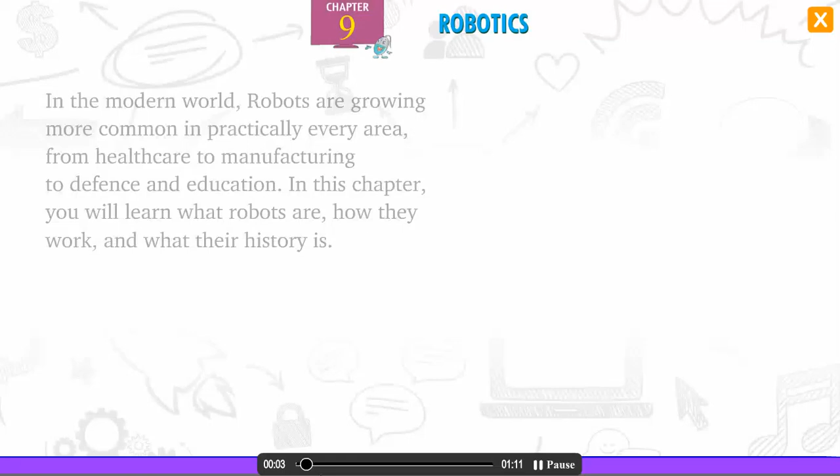Chapter 9, Robotics. In the modern world, robots are growing more common in practically every area, from healthcare to manufacturing to defense and education. In this chapter, you will learn what robots are, how they work, and what their history is.

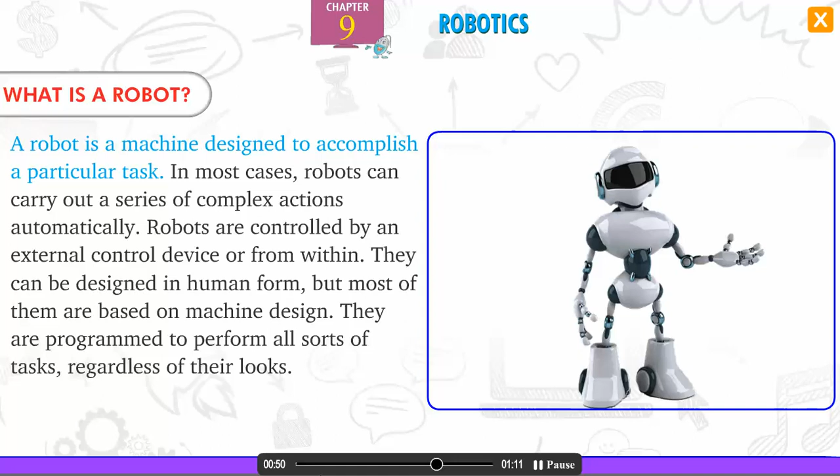What is a robot? A robot is a machine designed to accomplish a particular task. In most cases, robots can carry out a series of complex actions automatically. Robots are controlled by an external control device or from within. They can be designed in human form, but most of them are based on machine design. They are programmed to perform all sorts of tasks, regardless of their looks.

The word robot was coined by the Czech writer Karel Čapek in a 1920 play called Rossum's Universal Robots, and is derived from the Czech word robota, meaning drudgery or servitude.

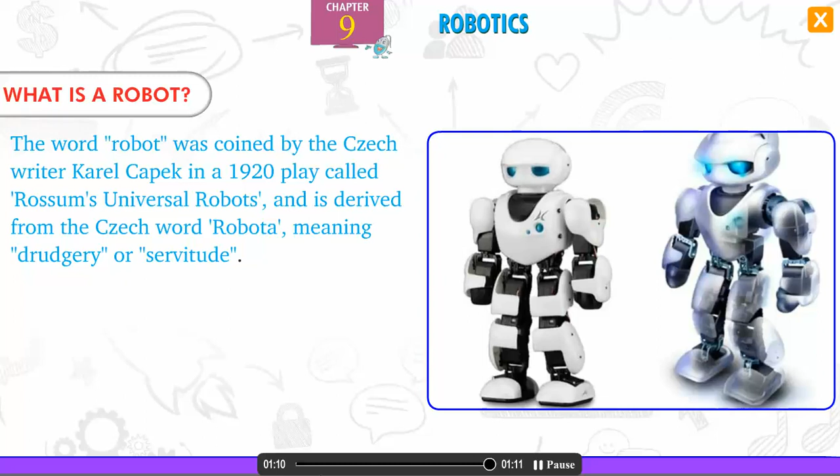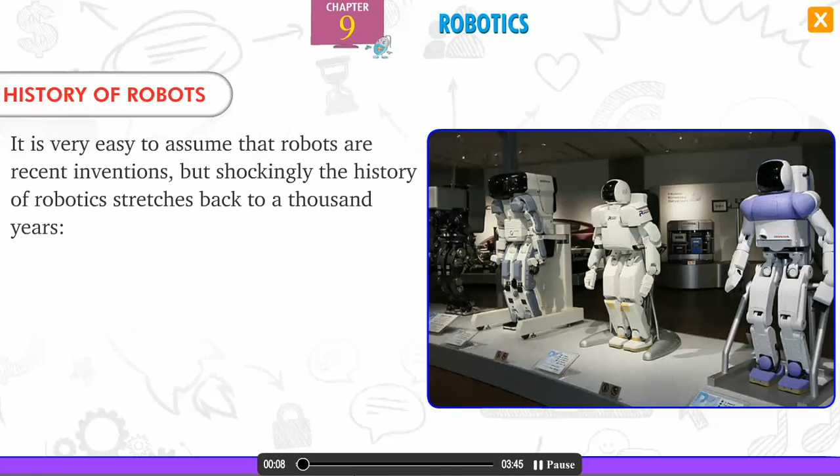Chapter 9, History of Robots. It is very easy to assume that robots are recent inventions, but shockingly, the history of robotics stretches back 1,000 years.

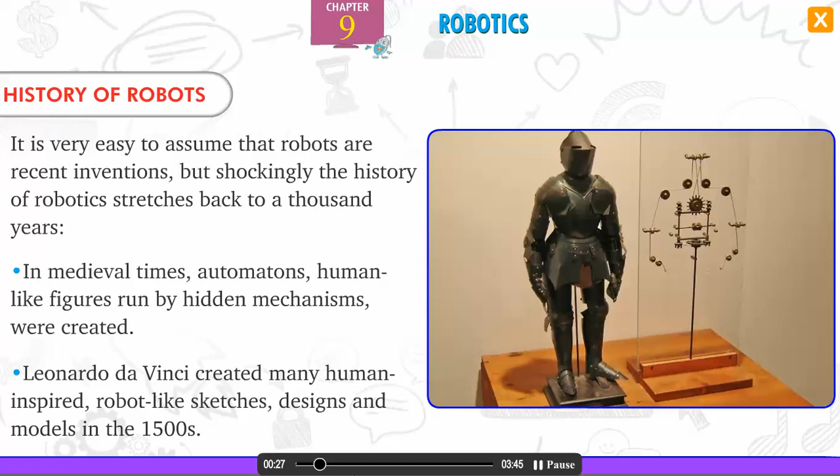In medieval times, automatons, human-like figures run by hidden mechanisms, were created. Leonardo da Vinci created many human-inspired robot-like sketches, designs and models in the 1500s. In the 18th century, miniature automatons became popular as toys for the very rich. They were made to look and move like humans or small animals.

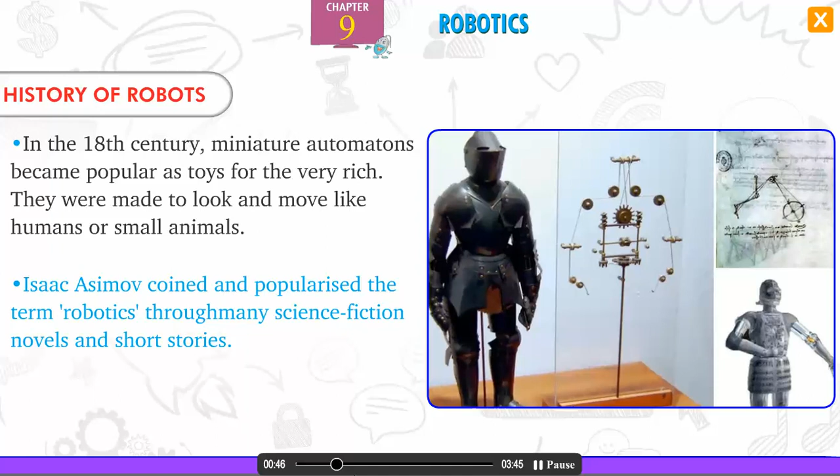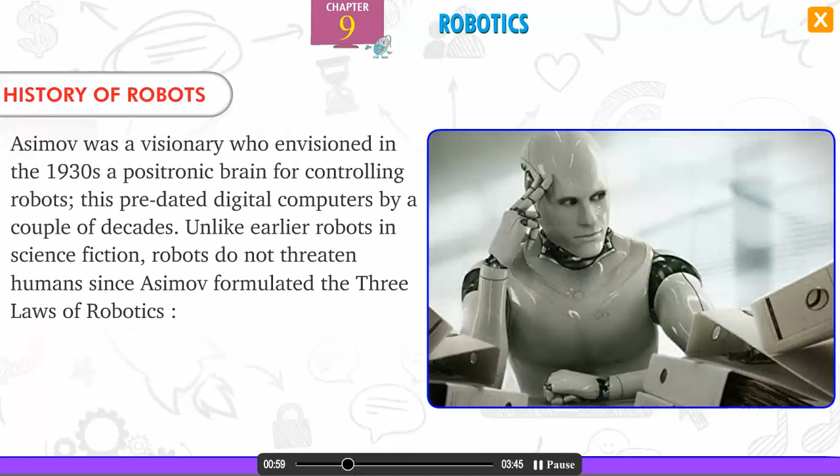Isaac Asimov coined and popularized the term robotics through many science fiction novels and short stories. Asimov was a visionary who envisioned in the 1930s a positronic brain for controlling robots. This predated digital computers by a couple of decades.

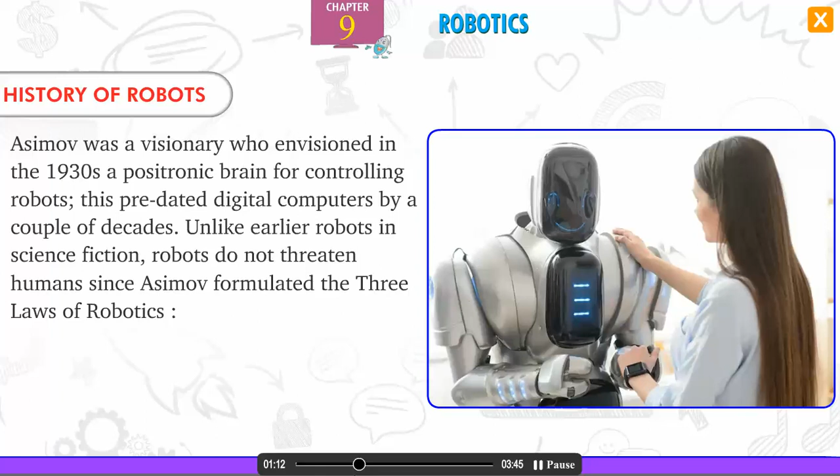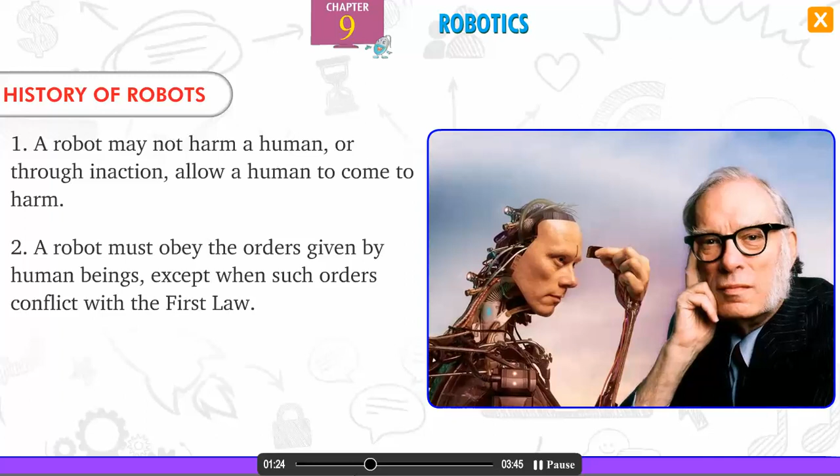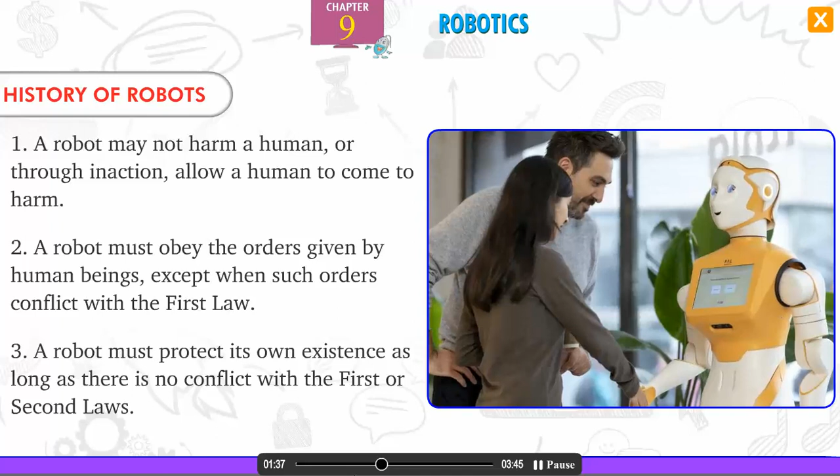Unlike earlier robots in science fiction, robots do not threaten humans since Asimov formulated the 3 laws of robotics. 1. A robot may not harm a human or through inaction allow a human to come to harm. 2. A robot must obey the orders given by human beings except when such orders conflict with the first law. 3. A robot must protect its own existence as long as there is no conflict with the first or second laws. Joseph Engelberger and George Devol were the fathers of industrial robots.

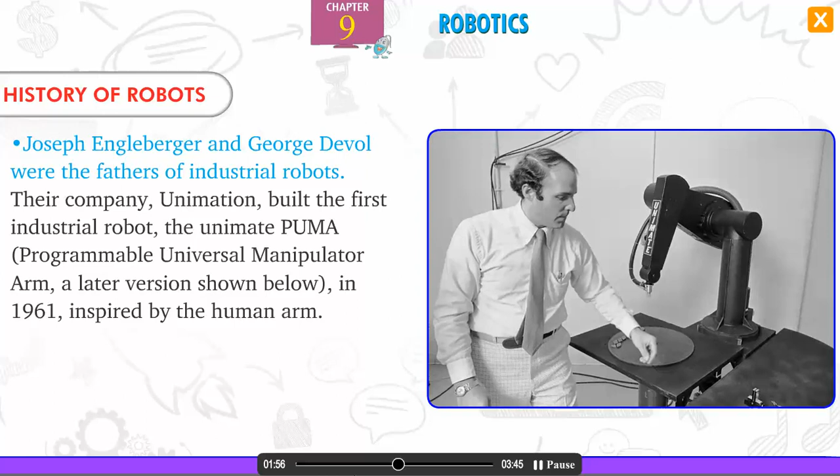Their company, Unimation, built the first industrial robot, the Unimate PUMA, Programmable Universal Manipulator Arm, a later version shown below, in 1961, inspired by the human arm.

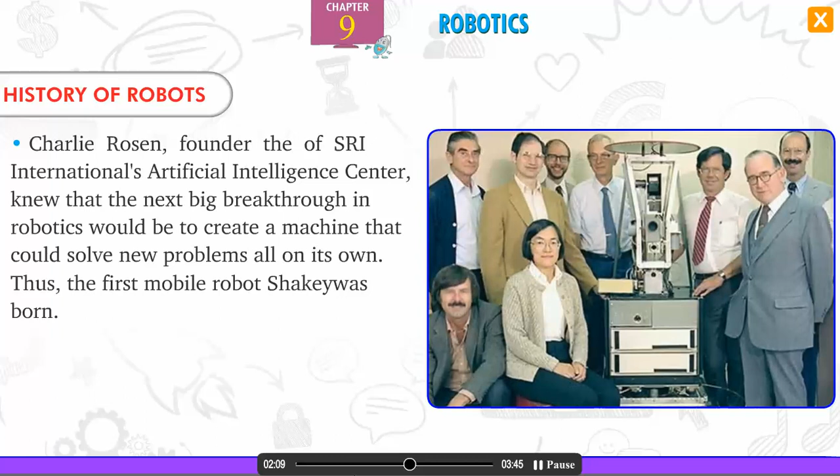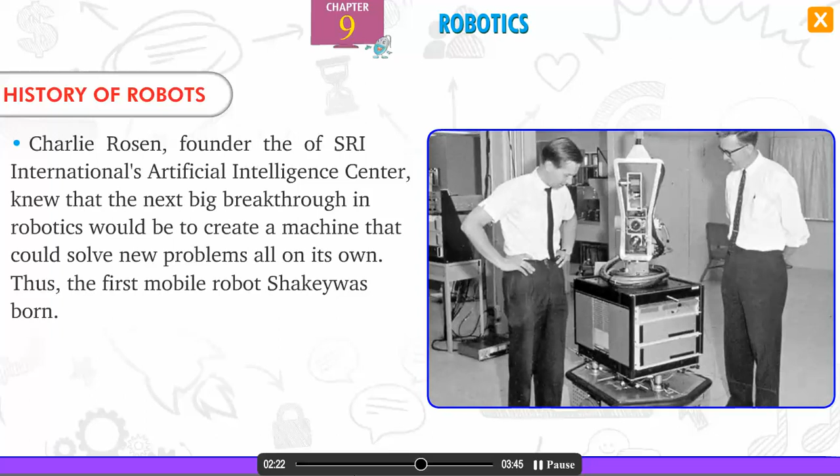Charlie Rosen, founder of SRI International's Artificial Intelligence Center, knew that the next big breakthrough in robotics would be to create a machine that could solve new problems all on its own. Thus, the first mobile robot, Shakey, was born.

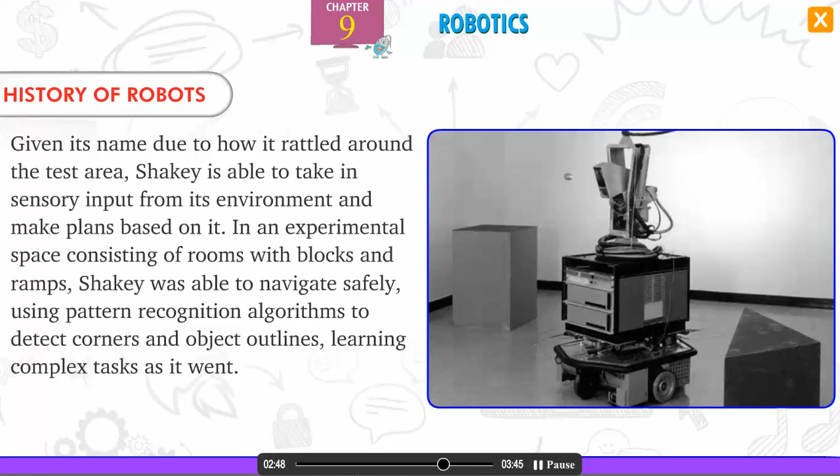Given its name due to how it rattled around the test area, Shakey is able to take in sensory input from its environment and make plans based on it. In an experimental space consisting of rooms with blocks and ramps, Shakey was able to navigate safely using pattern recognition algorithms to detect corners and object outlines, learning complex tasks as it went.

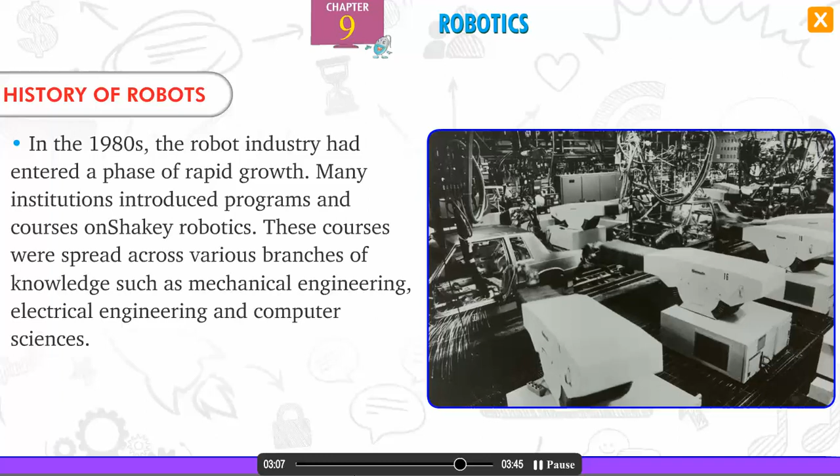In the 1980s, the robot industry had entered a phase of rapid growth. Many institutions introduced programs and courses on robotics. These courses were spread across various branches of knowledge such as mechanical engineering, electrical engineering, and computer sciences.

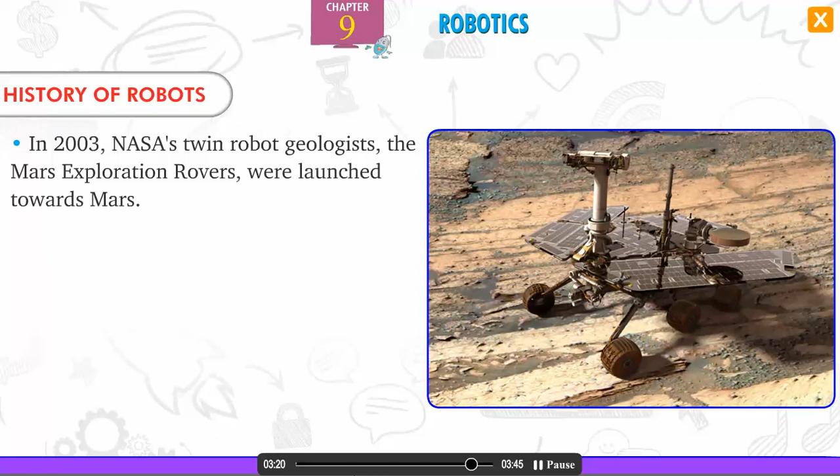In 2003, NASA's twin robot geologists, the Mars exploration rovers, were launched towards Mars. Remember, on 10 June and 7 July 2003, Mars exploration rovers were sent in search of water on Mars. This program was a long-term effort in the field of robotic exploration of space.

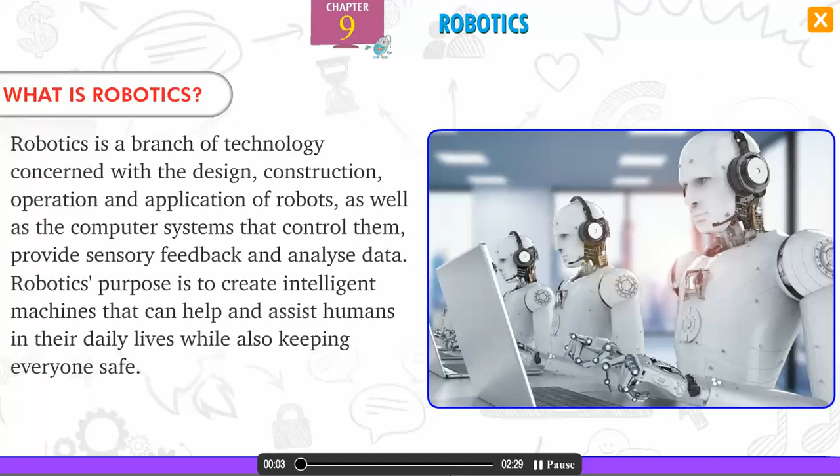History of Robotics. What is robotics? Robotics is a branch of technology concerned with the design, construction, operation and application of robots, as well as the computer systems that control them, provide sensory feedback and analyze data.

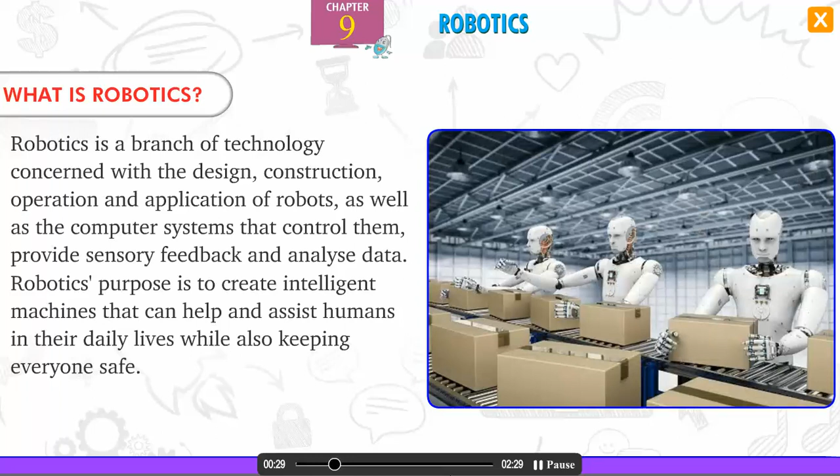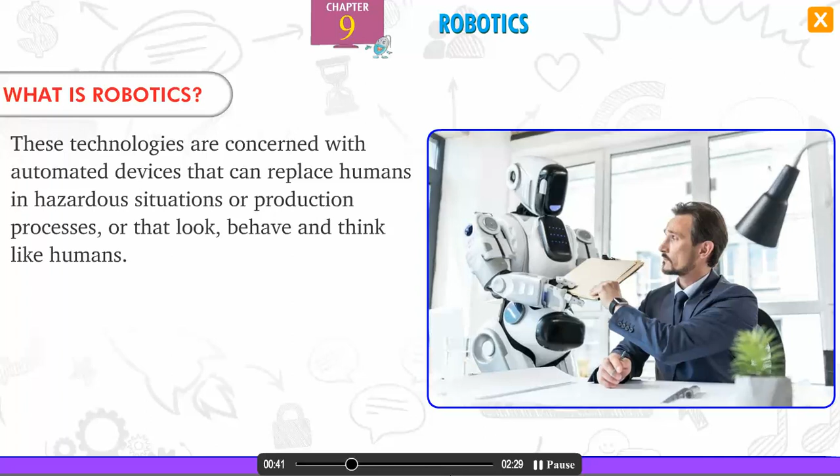Robotics' purpose is to create intelligent machines that can help and assist humans in their daily lives while also keeping everyone safe. These technologies are concerned with automated devices that can replace humans in hazardous situations or production processes, or that look, behave, and think like humans.

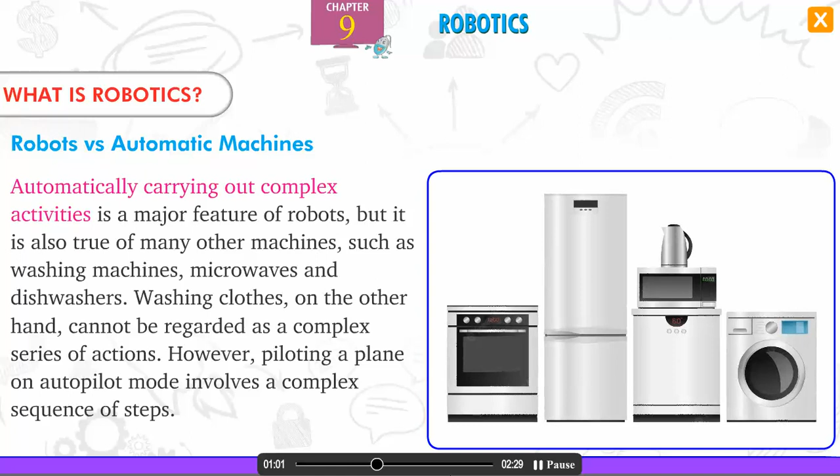Robots versus automatic machines. Automatically carrying out complex activities is a major feature of robots, but it is also true of many other machines such as washing machines, microwaves, and dishwashers. Washing clothes, on the other hand, cannot be regarded as a complex series of actions. However, piloting a plane on autopilot mode involves a complex sequence of steps.

As a result, many machines and robots are on the point of becoming automated. Many automatic devices are programmed mechanically and are not very flexible. Therefore, being programmable by a computer is another important feature of robots. However, because computers are already commonplace, it is difficult to use these features to differentiate a robot from another machine.

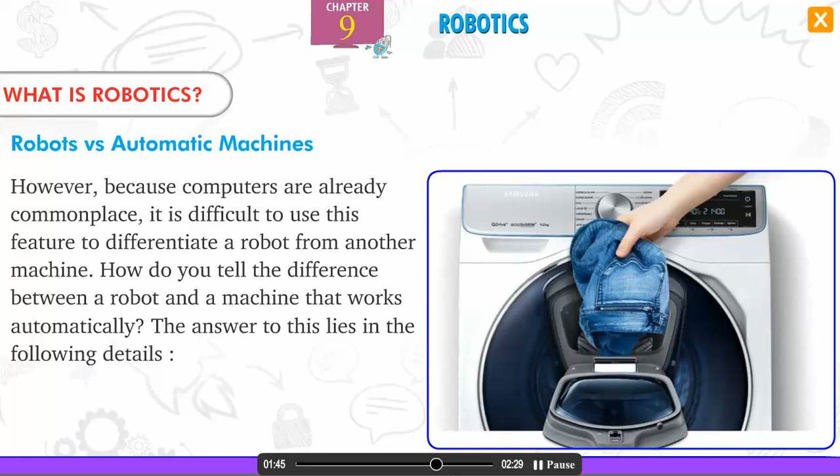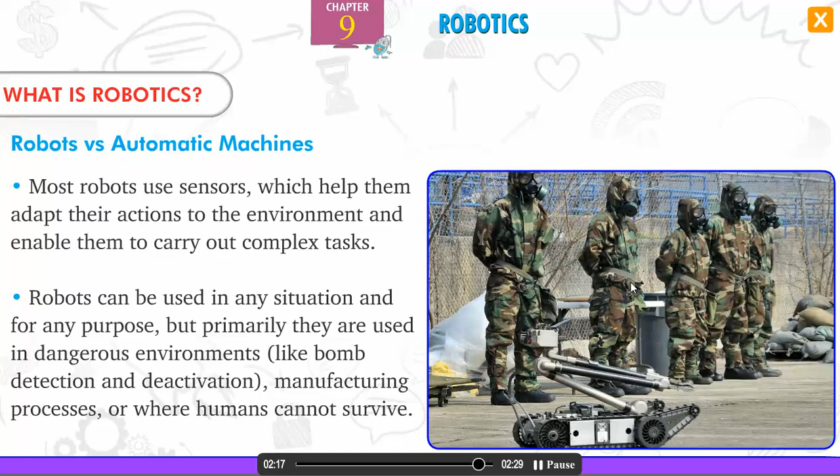How do you tell the difference between a robot and a machine that works automatically? The answer lies in the following details. Most robots use sensors, which help them adapt their actions to the environment and enable them to carry out complex tasks. Robots can be used in any situations or for any purpose, but primarily they are used in dangerous environments like bomb detection and deactivation, manufacturing processes, or where humans cannot survive.

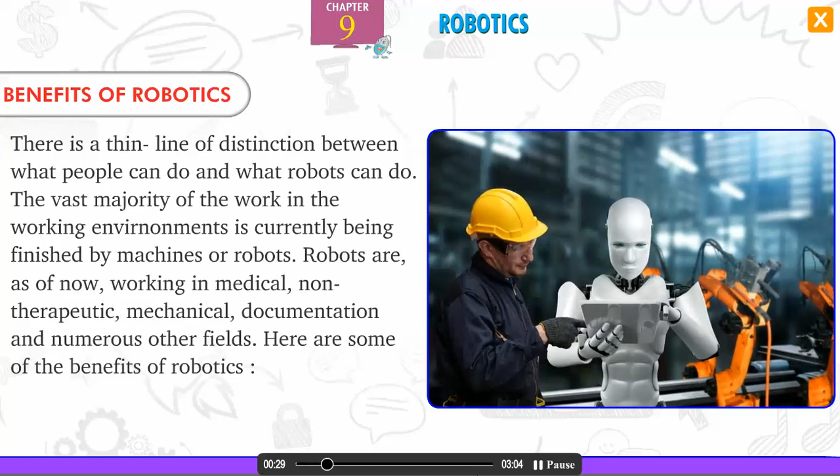Benefits of robotics. There is a thin line of distinction between what people can do and what robots can do. The vast majority of the work in working environments is currently being finished by machines or robots. Robots are, as of now, working in medical, non-therapeutic, mechanical, documentation, and numerous other fields. Here are some of the benefits of robotics.

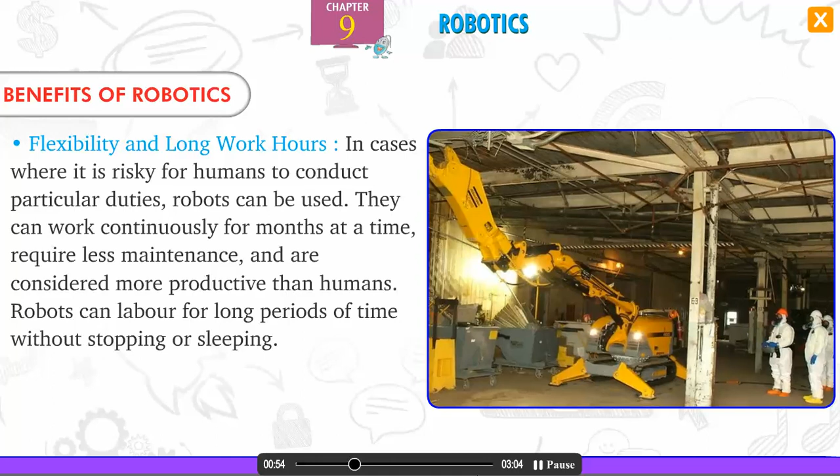Flexibility and long work hours. In cases where it is risky for humans to conduct particular duties, robots can be used. They can work continuously for months at a time, require less maintenance, and are considered more productive than humans. Robots can labor for long periods of time without stopping or sleeping.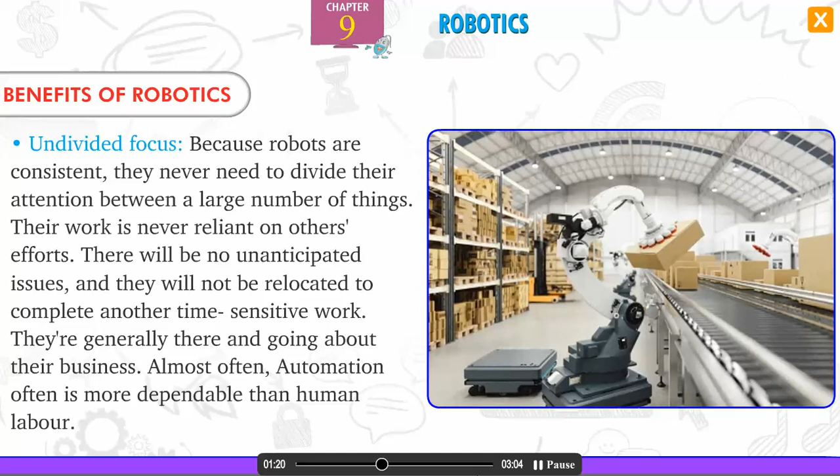Undivided focus. Because robots are consistent, they never need to divide their attention between a large number of things. Their work is never reliant on others' efforts. There will be no unanticipated issues, and they will not be relocated to complete another time-sensitive work. They are generally there and going about their business. Almost always, automation is more dependable than human labor.

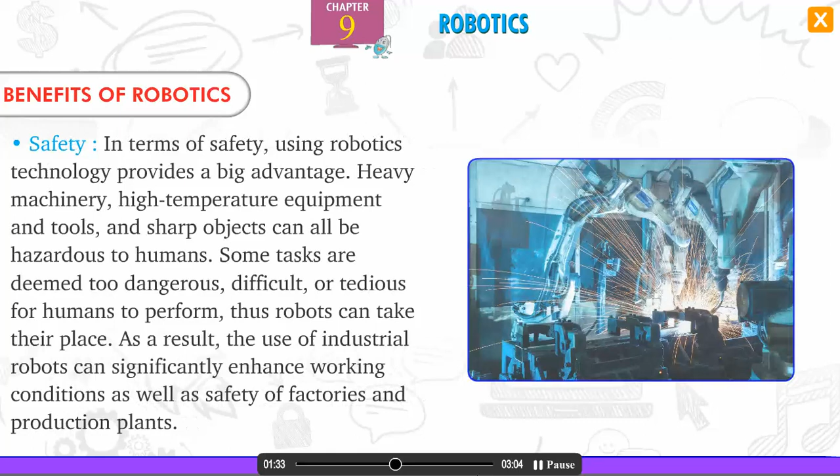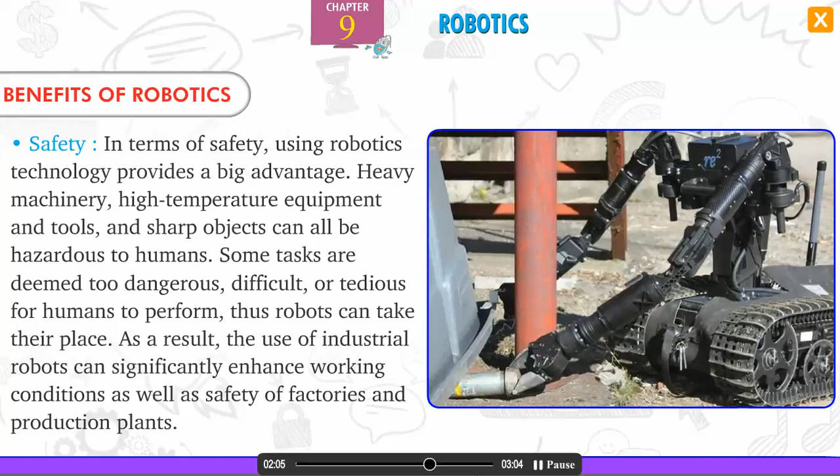Safety. In terms of safety, using robotics technology provides a big advantage. Heavy machinery, high temperature equipment and tools, and sharp objects can all be hazardous to humans. Some tasks are deemed too dangerous, difficult, or tedious for humans to perform. Thus, robots can take their place. As a result, the use of industrial robots can significantly enhance working conditions as well as safety of factories and production plants. Increase output with efficiency.

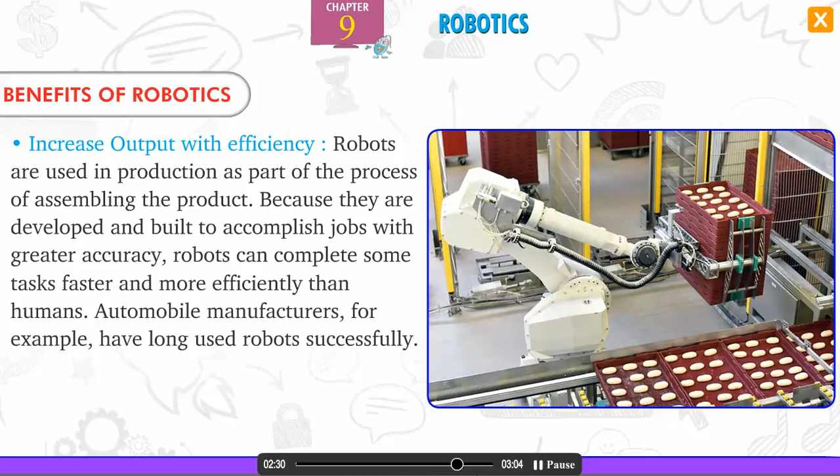Robots are used in production as part of the process of assembling the product. Because they are developed and built to accomplish jobs with greater accuracy, robots can complete some tasks faster and more efficiently than humans. Automobile manufacturers, for example, have long used robots successfully.

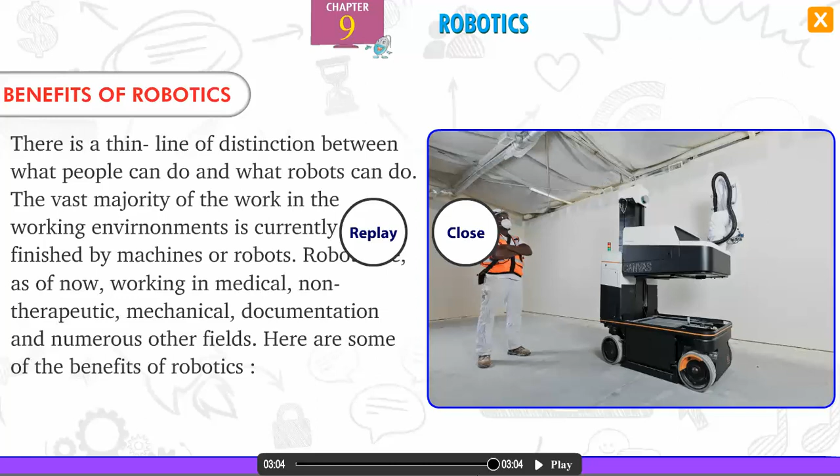Benefits of robotics. There is a thin line of distinction between what people can do and what robots can do. The vast majority of the work in working environments is currently being finished by machines or robots. Robots are, as of now, working in medical, non-therapeutic, mechanical, documentation, and other fields.

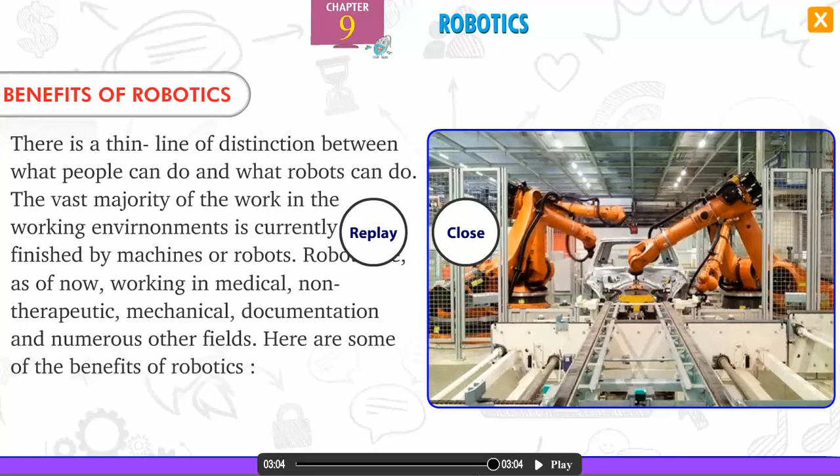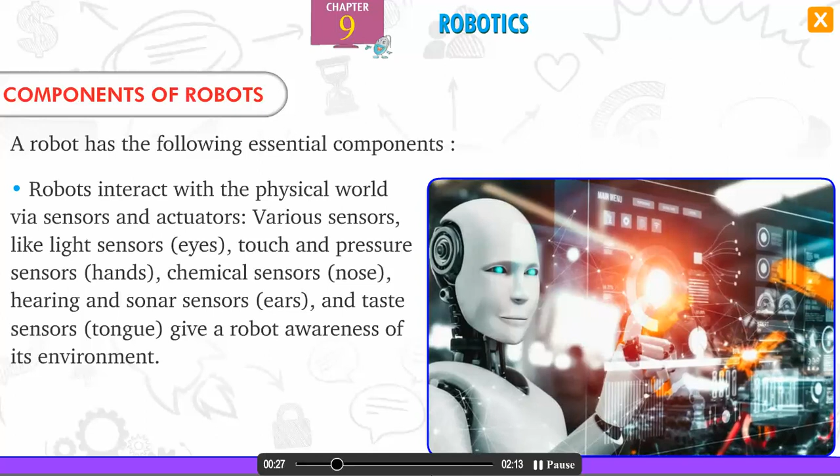Components of robots. A robot has the following essential components. Robots interact with the physical world via sensors and actuators. Various sensors like light sensors (eyes), touch and pressure sensors (hands), chemical sensors (nose), hearing and sonar sensors (ears), and taste sensors (tongue) give a robot awareness of its environment.

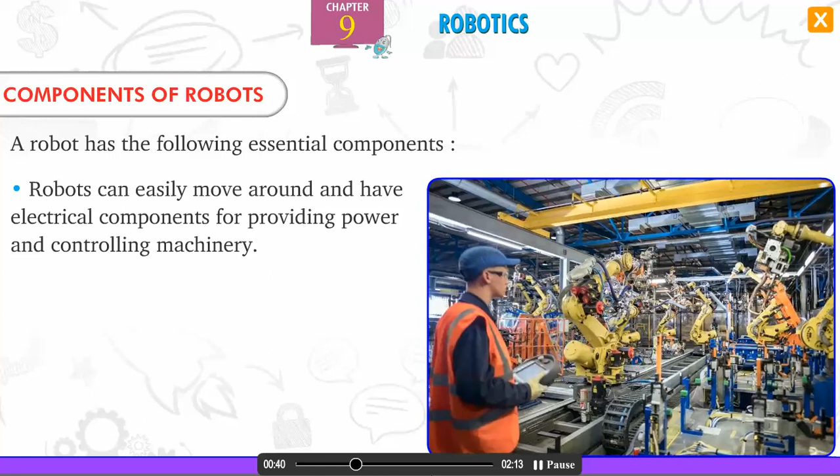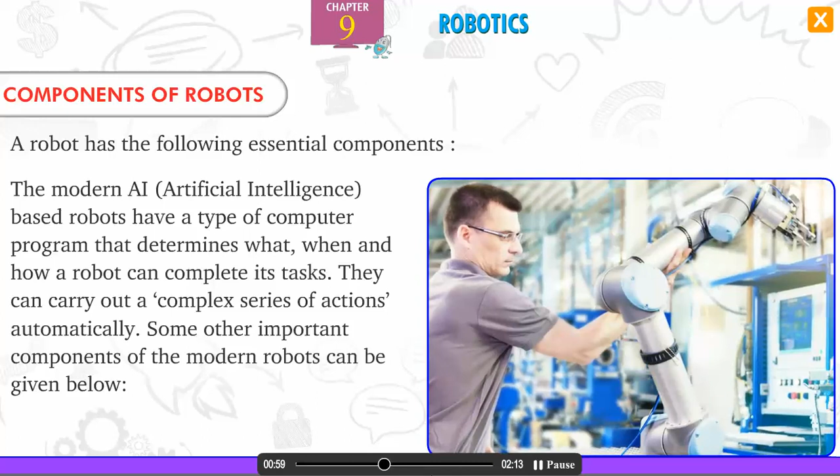Robots can easily move around and have electrical components for providing power and controlling machinery. Various mechanical constructions help to shape or form the design of a robot so that it can accomplish a particular task. Modern AI-based robots have a type of computer program that determines what, when, and how a robot can complete its task. They can carry out a complex series of actions automatically. Some other important components of modern robots are given below.

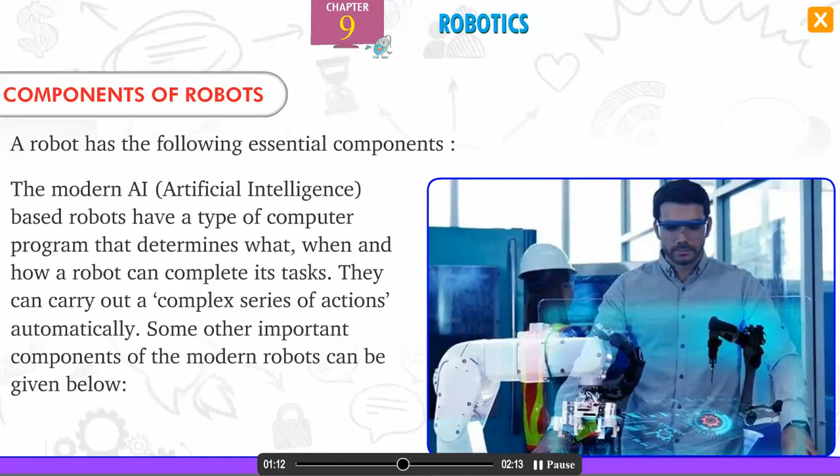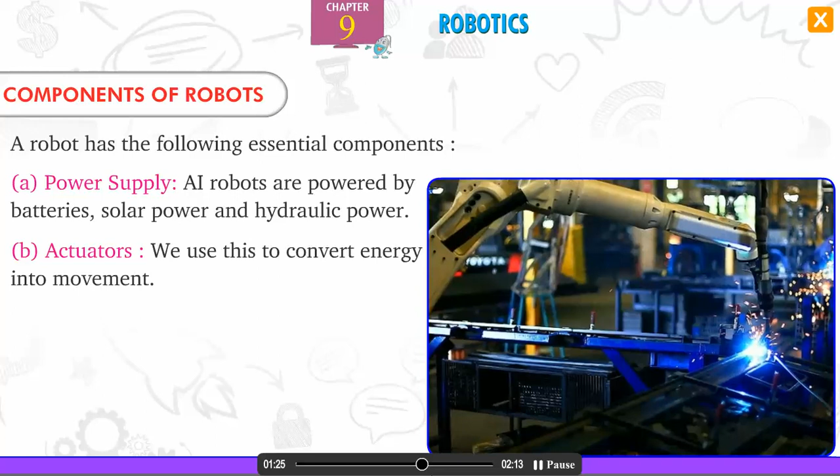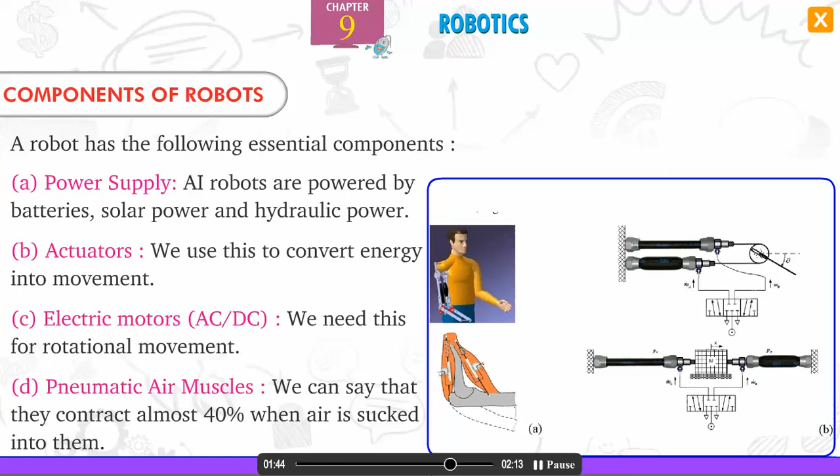A. Power supply. AI robots are powered by batteries, solar power, and hydraulic power. B. Actuators. We use this to convert energy into movement. C. Electric motors, AC or DC, which we need for rotational movement. D. Pneumatic air muscles, which contract almost 40% when air is sucked into them. E. Muscle wires, which contract by 5% when an electric current is passed through them.

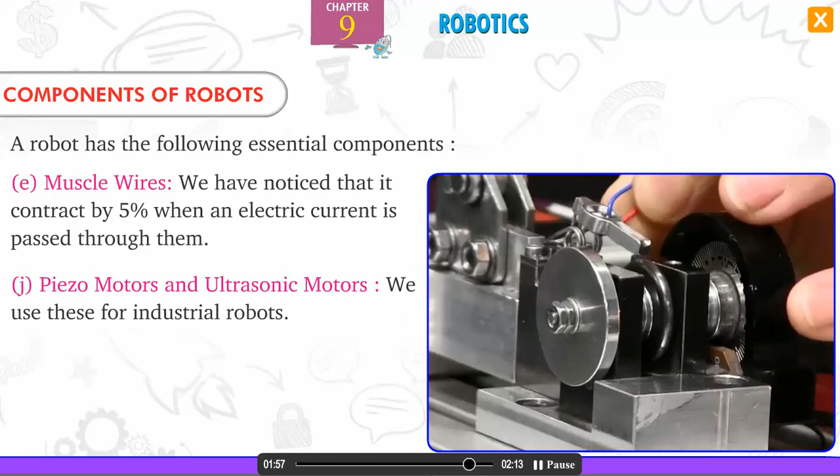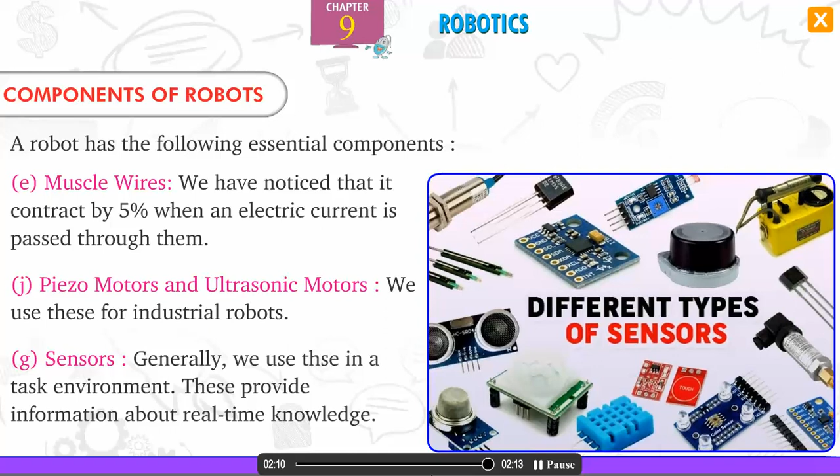F. Piezo motors and ultrasonic motors. We use these for industrial robots. G. Sensors. Generally, we use these in a task environment. These provide information about real-time knowledge. Components of robots. A robot.

Types of robots. Depending on the use and application, robots can be classified into three types. Simple level robots are simple and cannot carry out heavy or complex tasks; they are just able to support humans in their daily tasks, for example washing machines. Middle-level robots, once programmed, cannot be reprogrammed and have sensor-based circuits which can perform multiple tasks, for example a fully automatic washing machine.

Complex-level robots can be programmed and reprogrammed easily. They have complex model-based circuits, for example laptops or computers. Types of robots.

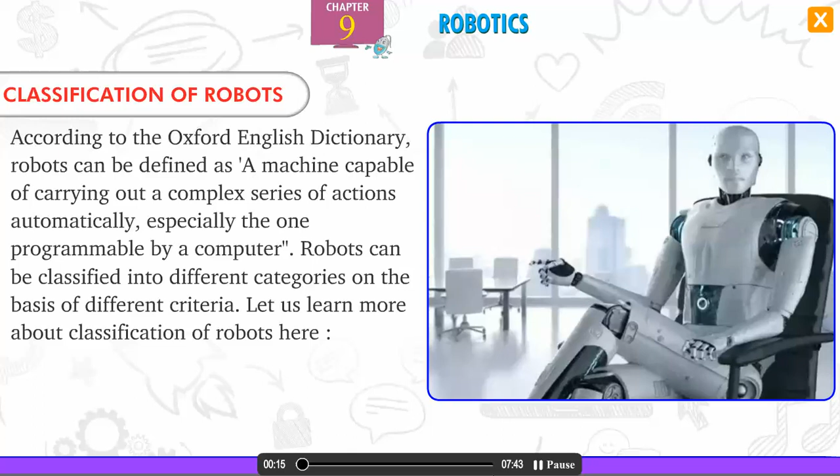Classification of robots. According to the Oxford English Dictionary, robots can be defined as a machine capable of carrying out a complex series of actions automatically, especially one programmable by a computer. Robots can be classified into different categories on the basis of different criteria. Let us learn more about classification of robots here.

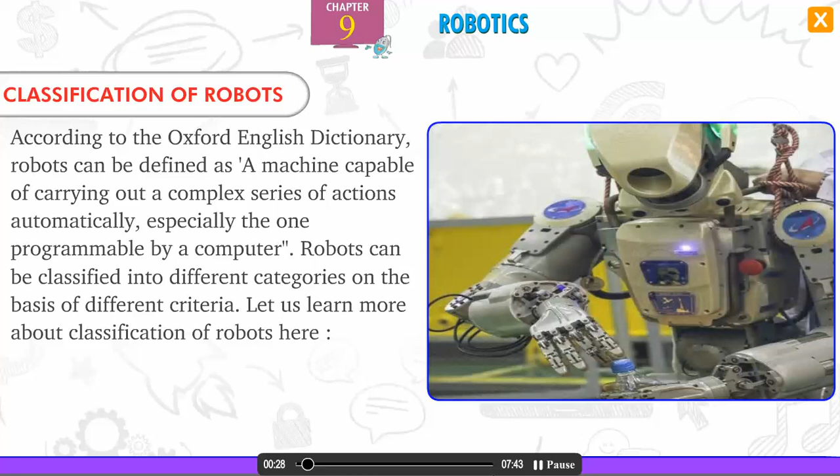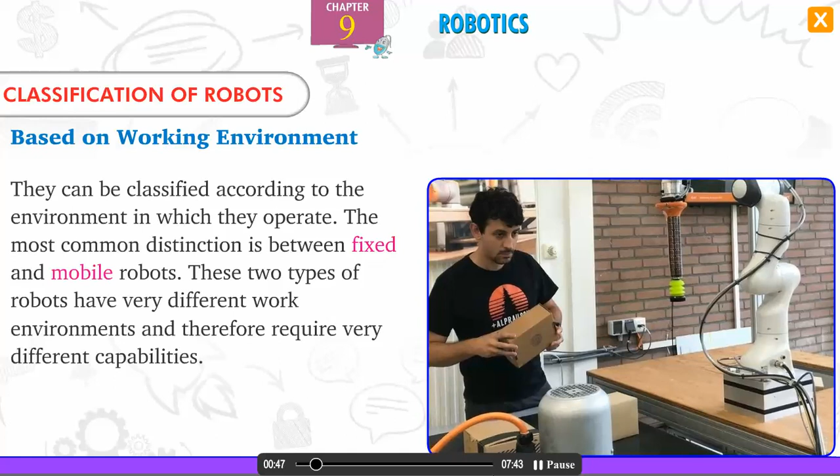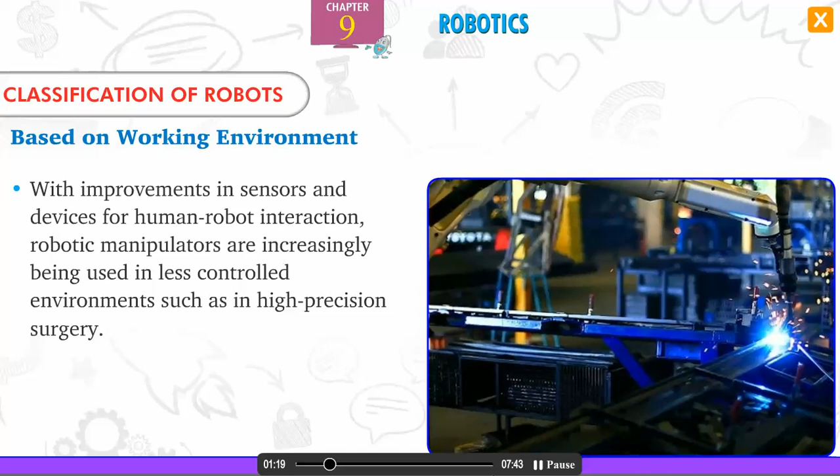Based on working environment, robots can be classified according to the environment in which they operate. The most common distinction is between fixed and mobile robots. These two types have very different work environments and therefore require very different capabilities. Fixed robots are mostly industrial robotic manipulators that work in well-defined environments adapted for robots, performing specific repetitive tasks such as soldering or painting parts in car manufacturing plants. With improvements in sensors and devices for human-robot interaction, robotic manipulators are increasingly being used in less controlled environments, such as in high-precision surgery.

Mobile robots move around and perform tasks in large, uncertain environments. They are quite helpful in situations that are not defined in advance and keep on changing over time. They deal with unpredictable entities like humans and even animals. Self-driving cars, vacuum cleaners and drones are some common examples of mobile robots.

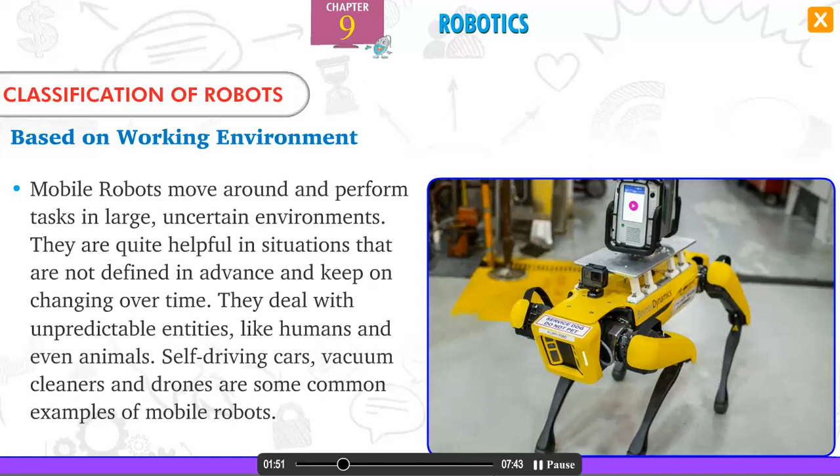Based on application, robots have precision, accuracy, speed and dependability. Therefore, companies are trying their best to bring robots into action. Below is the classification of robots based on application.

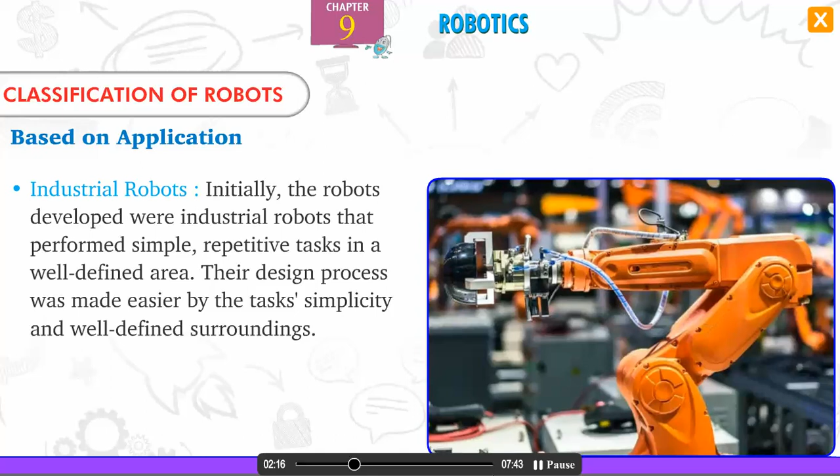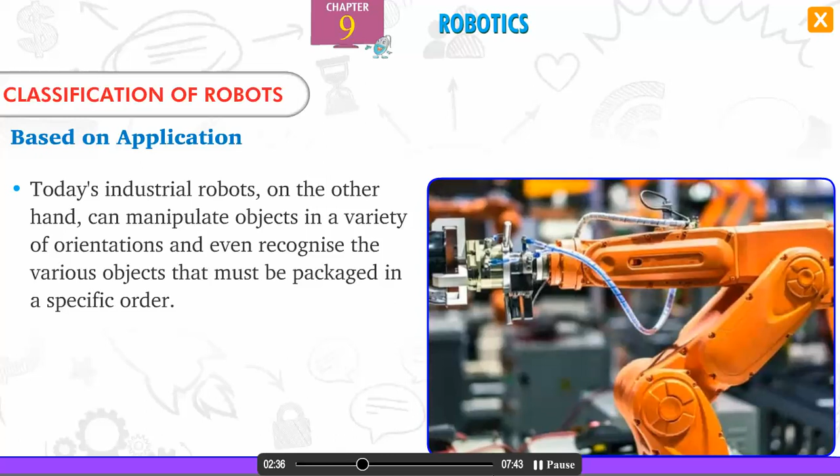Industrial robots. Initially, the robots developed were industrial robots that performed simple, repetitive tasks in a well-defined area. Their design process was made easier by the task simplicity and well-defined surroundings. Today's industrial robots, on the other hand, can manipulate objects in a variety of orientations and even recognize the various objects that must be packaged in a specific order.

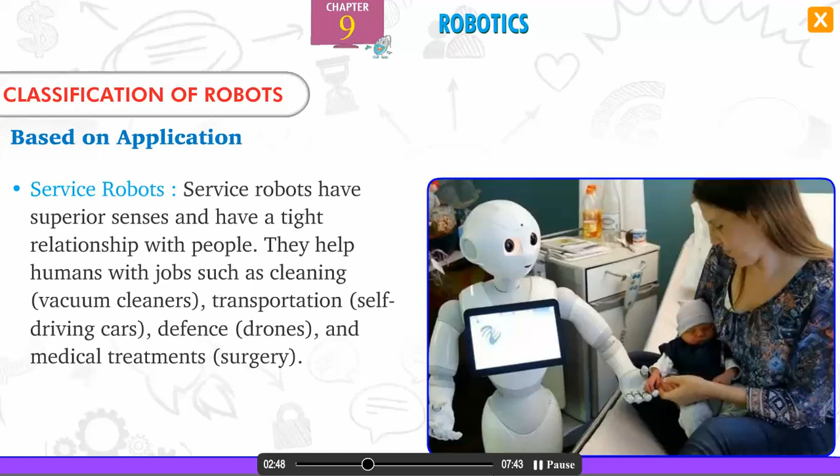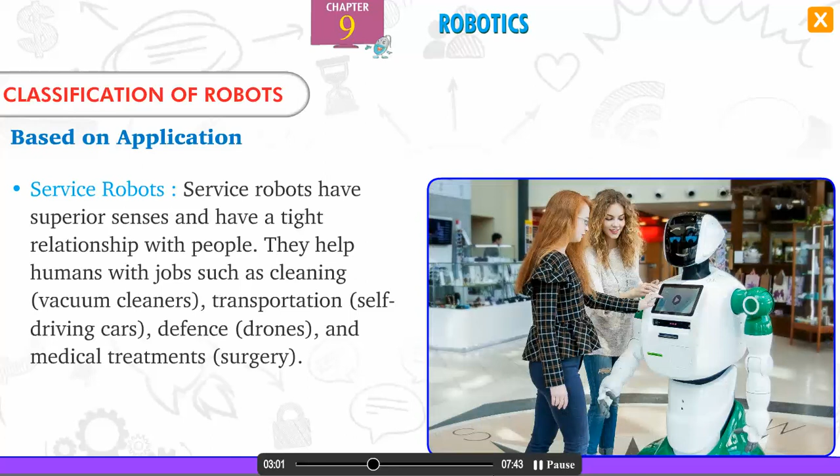Service robots. Service robots have superior senses and have a tight relationship with people. They help humans with jobs such as cleaning, vacuum cleaners, transportation, self-driving cars, defense, drones, and medical treatments, surgery.

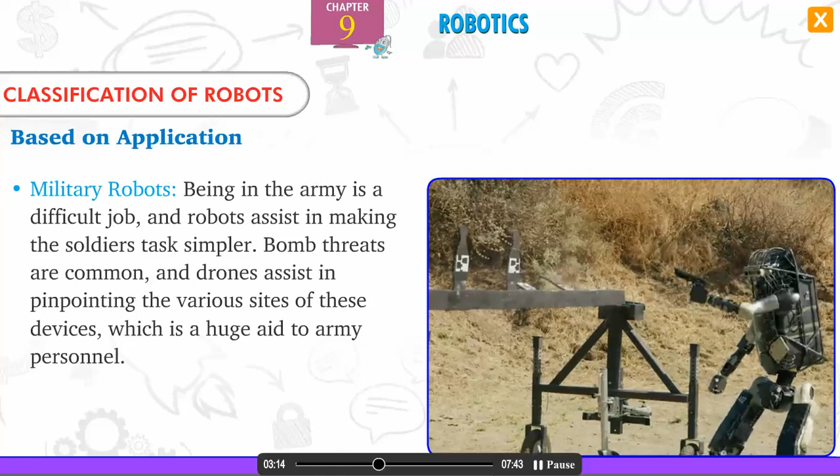Military robots. Being in the army is a difficult job and robots assist in making the soldiers' task simpler. Bomb threats are common and drones assist in pinpointing the various sites of these devices, which is a huge aid to army personnel.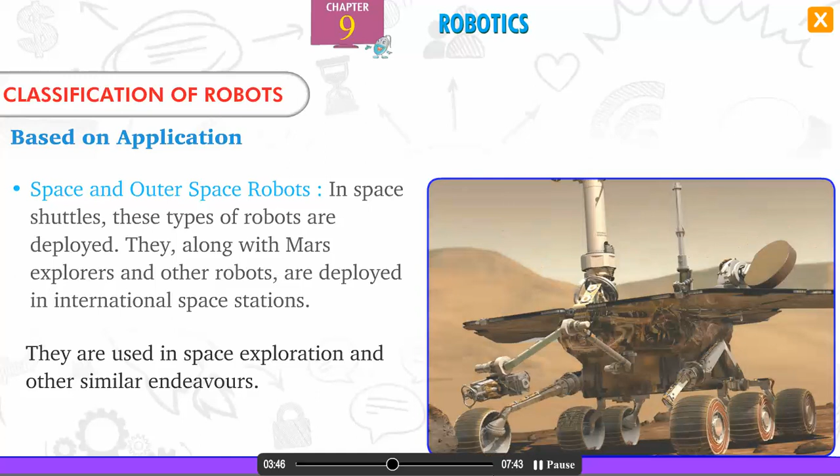Based on the task they are designed for, robots come in all shapes and sizes. Majorly, robots are of 5 types.

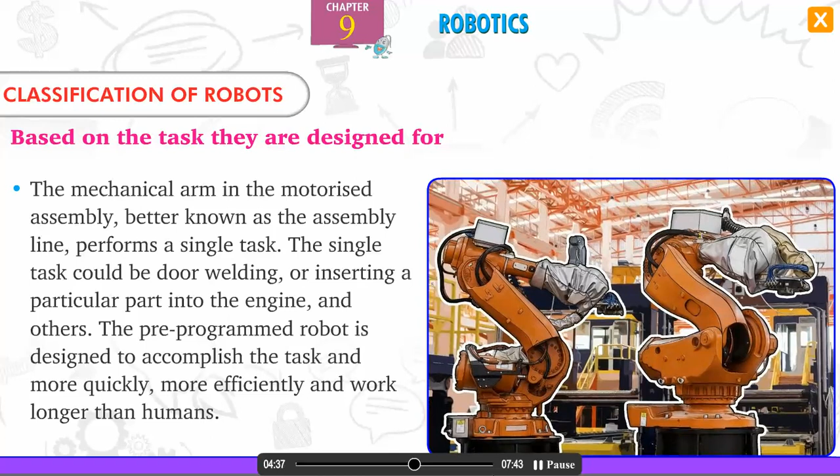Pre-programmed robots. These robots are made to work in a controlled environment where they are programmed to do repetitive work efficiently to save time and human efforts. For example, the mechanical arm located on a motorized assembly line performs a single task, such as door welding or inserting a particular part into the engine. The pre-programmed robot is designed to accomplish the task more quickly, more efficiently and work longer than humans.

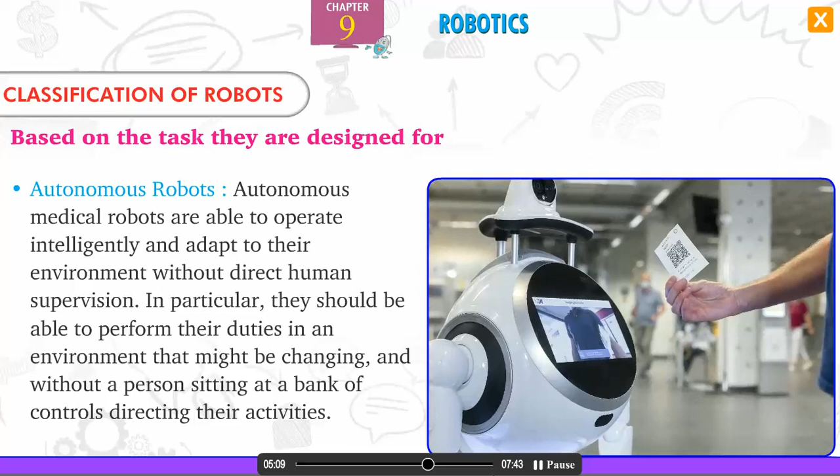Autonomous robots are able to operate intelligently and adapt to their environment without direct human supervision. In particular, they should be able to perform their duties in an environment that might be changing, without a person sitting at a bank of controls directing their activities. Examples of autonomous robots are cleaning bots, hospitality bots, medical assistant robots, autonomous drones, and lawn trimming robots.

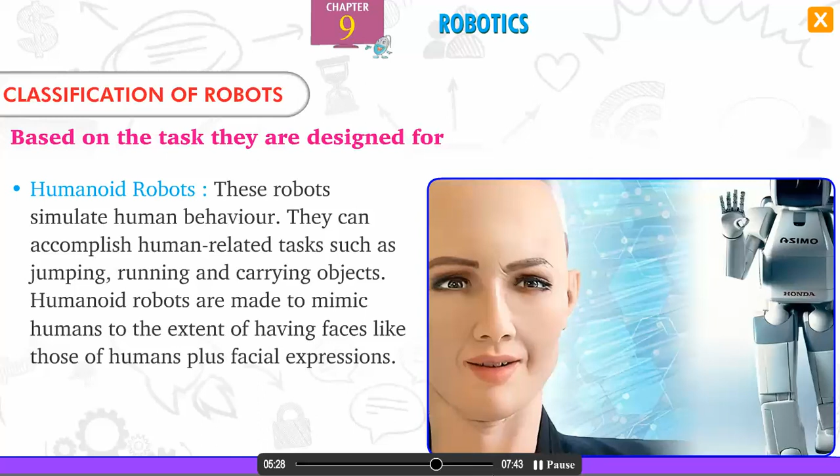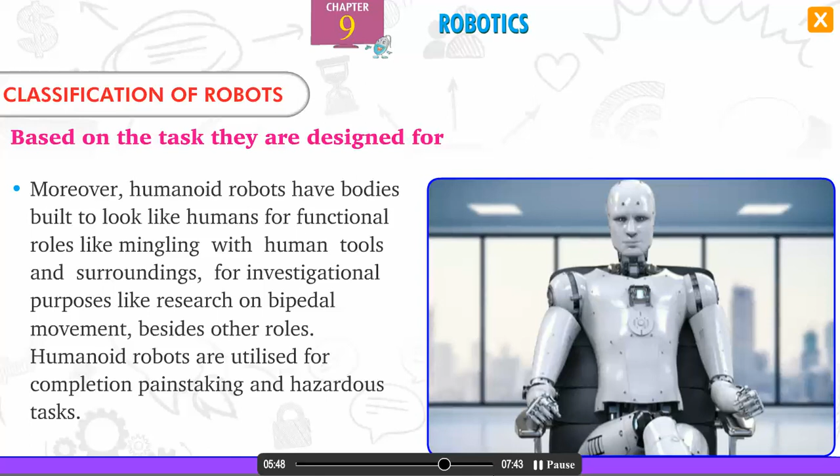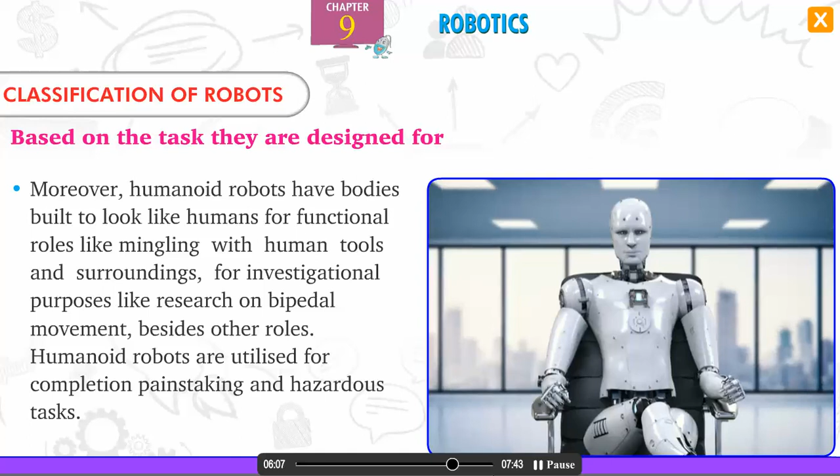Humanoid robots simulate human behavior. They can accomplish human-related tasks such as jumping, running, and carrying objects. Humanoid robots are made to mimic humans to the extent of having faces like those of humans plus facial expressions. Moreover, humanoid robots have bodies built to look like humans for functional roles like mingling with human tools and surroundings, for investigational purposes like research on bipedal movement, besides other roles. Humanoid robots are utilized for completion of painstaking and hazardous tasks.

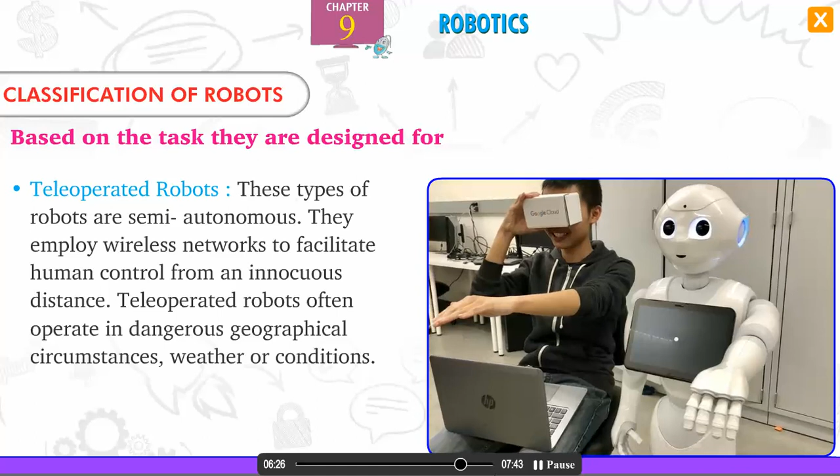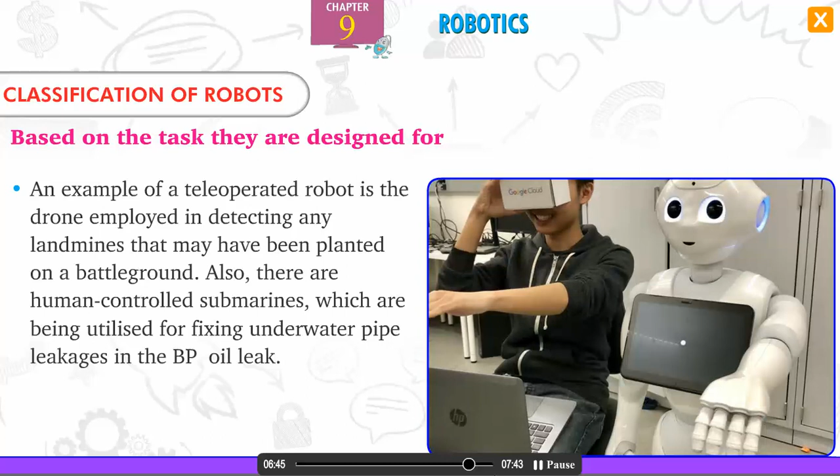Teleoperated robots are semi-autonomous. They employ wireless networks to facilitate human control from an innocuous distance. Teleoperated robots often operate in dangerous geographical circumstances, weather or conditions. An example is the drone employed in detecting any landmines that may have been planted on a battleground. Also, there are human-controlled submarines being utilized for fixing underwater pipe leakages in the BP oil leak.

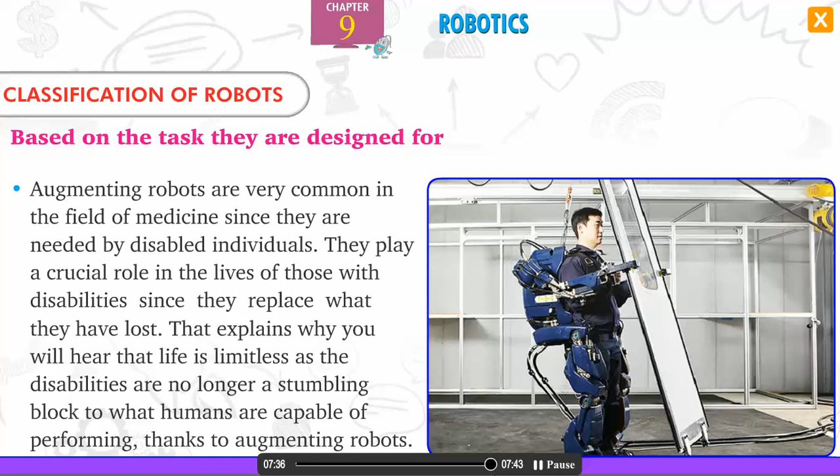Augmenting robots. As the name suggests, augmenting robots are designed to either improve present human abilities or replace skills that humans may have lost. These robots are considered the most helpful to humans. Augmenting robots are very common in the field of medicine since they are needed by disabled individuals. They play a crucial role in the lives of those with disabilities since they replace what they have lost. That explains why you will hear that life is limitless, as disabilities are no longer a stumbling block to what humans are capable of performing, thanks to augmenting robots.

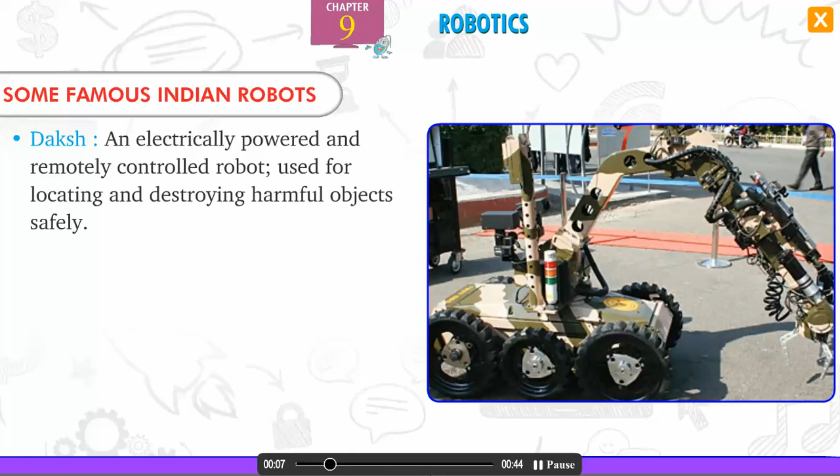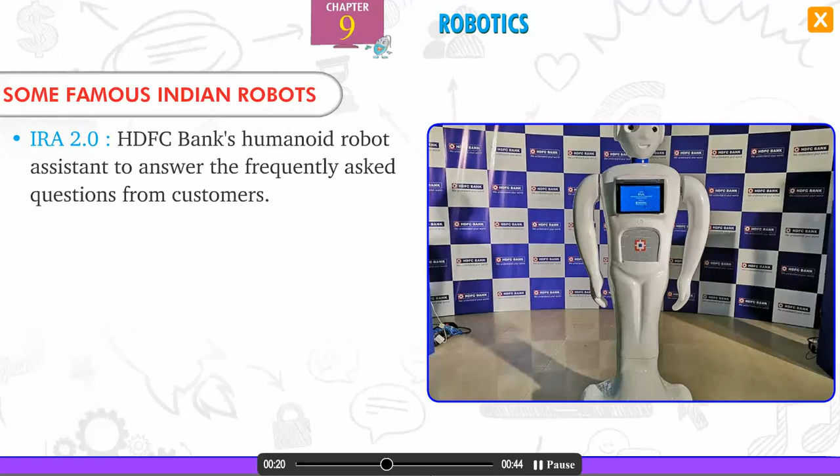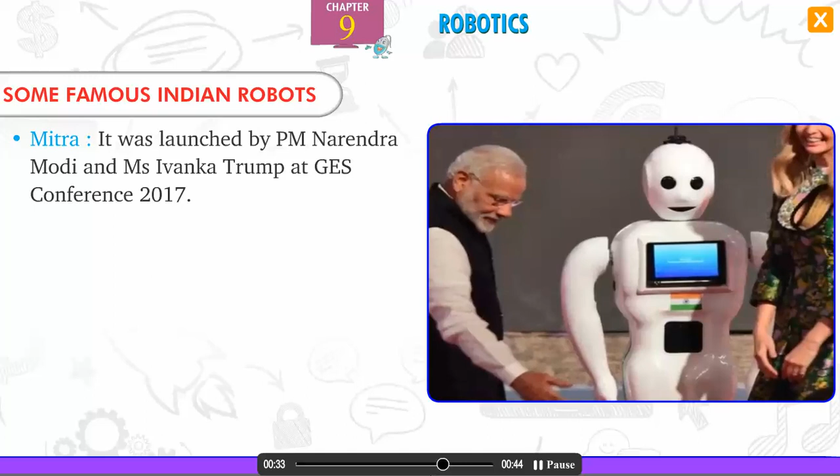Some famous Indian robots. Daksh, an electrically powered and remotely controlled robot used for locating and destroying harmful objects safely. IRA 2.0, HDFC Bank's humanoid robot assistant to answer frequently asked questions from customers. Mitra, launched by PM Narendra Modi and Miss Ivanka Trump at GES Conference 2017. Manav, India's first 3D printed humanoid robot, can perform push-ups and play football.

Sum up. A robot is a machine that is programmed by a computer and can do many complex actions automatically. Depending on the use and application, robots can be classified into 3 types: simple level, middle level, and complex level robots. Fixed robots are mostly used in industries with a well-defined work environment adapted for robots.

Mobile robots move around and perform tasks in large, uncertain environments. Robotics deals with the design, construction, operation, and use of robots, including the design of computer systems for their control, sensory feedback, and information processing. The robots that show intelligent behavior after getting programmed are called artificially intelligent robots. Sum up.